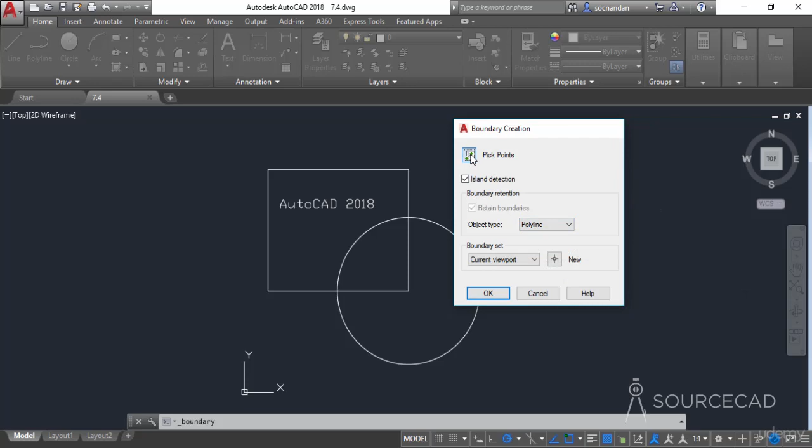Now when you click at this point, you'll notice that this complete area will be highlighted. So that's the boundary which will be created. Now press enter, and we have a boundary. Now click on this boundary, and the boundary is highlighted. It's now selected, and you can find the area of this complete polyline to find the area of this region.

And you can simply do that by going to the property palette. So right click, go to the properties and scroll it down, and here we have the area, which is 3662.305 square units, and also the perimeter or the length of this complete boundary.

So that's quite an easy way of finding the area, and there are also many other applications of this boundary tool. Also, you can use this geometry separately, so you can click on this boundary, move it elsewhere, and you can use it. Similarly, you can create a boundary with the region tool. So in this case, the boundary has been created with polyline, as you can see on the tooltip.

Now I'll select the same boundary tool, and this time I'll change the object type to region. Now click on the pick point, and this time I'll select this pick point, press enter. Now we have a region boundary, and obviously you can move it using this grip, and here also you can find the area using the property palette. So we have the area and perimeter and also the boundary, so you can use any of these methods. So let's now erase both of these boundaries.

In AutoCAD, the hatch patterns have a unique property of avoiding any object which is already present in the island. For example, here we have this text. Now I'll apply hatch pattern on this island or in this area. For that, I'll select the hatch tool and select this ANSI31 pattern and click on this area.

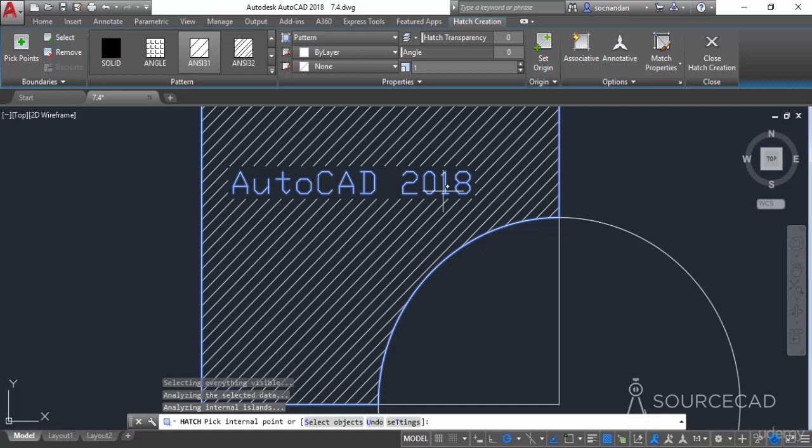Now when you click on this area, you'll notice that the hatch will completely ignore the area which is covering this text. In that way, the text will remain legible against the background. Now click on this close hatch creation, and here we have the hatch. Now what if you decide to make this text after creating the hatch? In that case, the hatch will completely overlap the text, and for those cases you can use the wipeout tool.

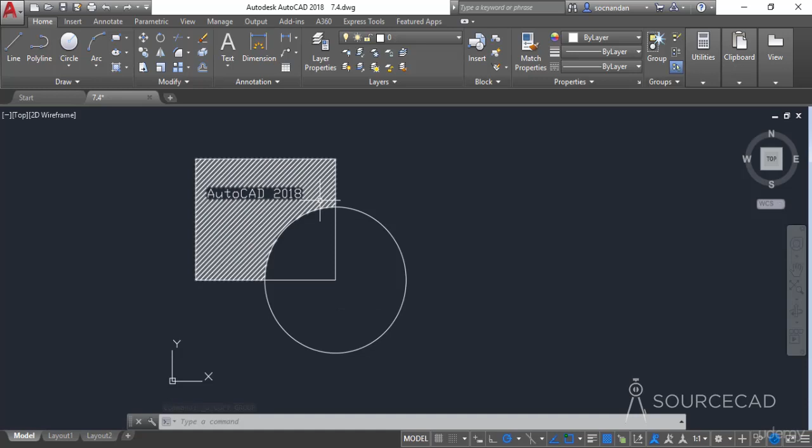So let's create a hatch here, and then we'll copy this text here. So go to the hatch tool and click on this area, and let's change the color of this hatch to green in order to clearly separate both of these hatches, and click on close hatch creation. Now we'll copy this text on this area or on this hatch. So select the copy tool, click on the text, press enter, move it on this area.

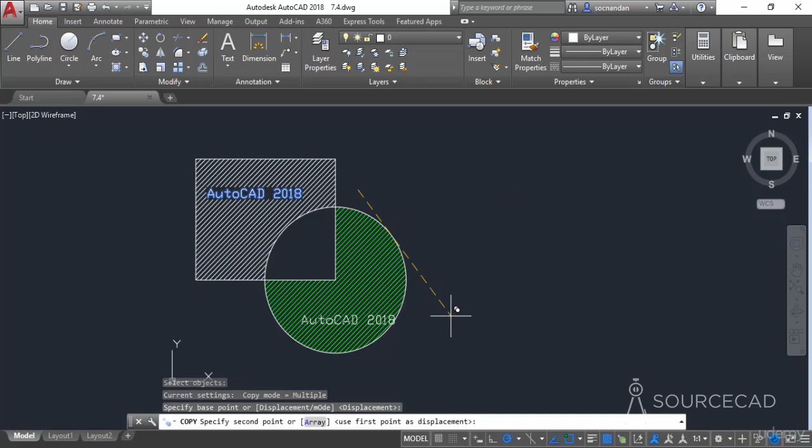Now we don't have any clear boundaries here, and obviously the text is not very clearly visible against the hatch background. So there are a couple of ways to make it very clear, and in order to remove these hatches along the boundary of this text, you can use the wipeout feature. So before using the wipeout feature, I'll make a rectangle. So go to the rectangle and create a rectangular boundary around this text. So this text boundary will be used for clearing up the hatches.

Now select the wipeout tool. So expand the draw panel and select the wipeout tool from here. Now we have an option here, which is polyline. Select this polyline and select the polyline here, and here we have an option of erasing the polyline. So whether we want to erase the polyline or not, you can select it here. I'll select yes, we want to erase the polyline. So now the hatch patterns are clear, but we still have a problem.

The text is not visible, and in order to bring this text in the front of hatch and in order to make it visible, we need to change its draw order. So select the text. When you move your cursor, you'll see that the text will be highlighted, and you can select it. Now type draw order and press enter. Now we need to move it to the front. So simply select this front option, and here we have it. The text is now visible.

Now there are also other ways of clearing the area. So I'll select this rectangle and I'll erase it. And simply by erasing the rectangle, we can again bring back the hatches. Now I'll go to this wipeout tool once again, and now I'll create a frame around this text. So you can simply click on different points to create the frame. You don't need to necessarily have a frame or a polyline. And here we have it. Now simply press enter, and here we have the wipeout region.

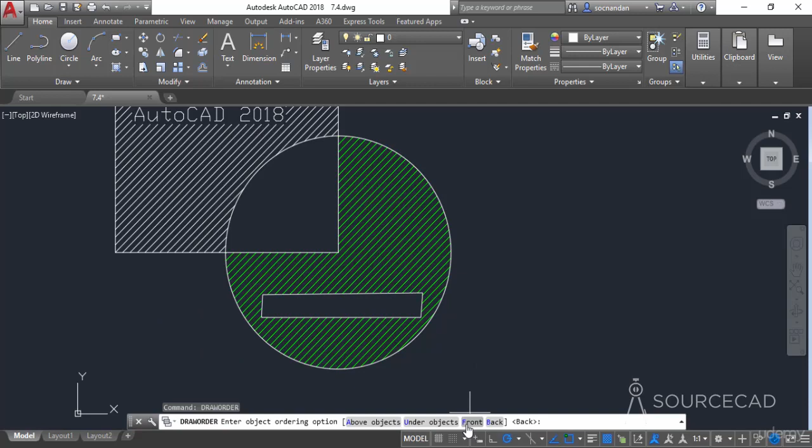And in this case also, in order to bring it to the front, you need to select the text and change its draw order. So select the draw order, click on front. Here we have the text. Now the frame is visible in these cases.

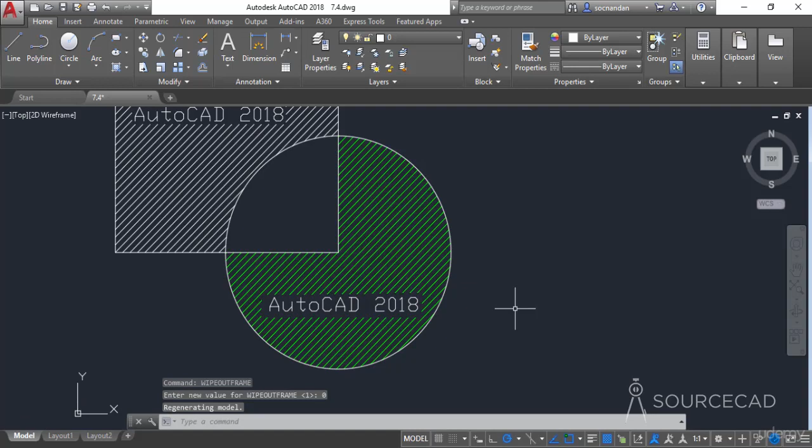Now if you want to hide these frames also from the drawing area, you can use the WIPEOUTFRAME system variable. So type wipeout frame, press enter, and now change its value to 0. And we don't have any frame boundary here. So in this way, you can change the values of the system variable to make this wipeout frame even more visible. So that was all about wipeout and boundary tools.